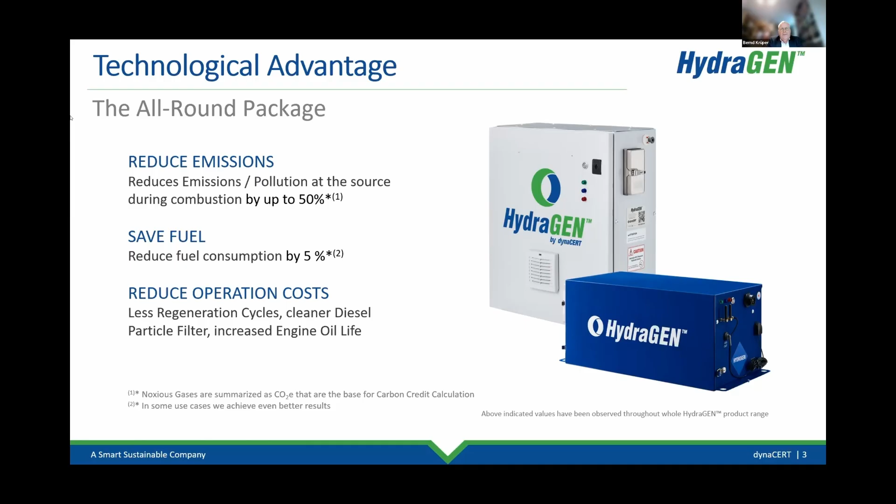That's the hardware. Besides the hardware, we also have software called Hydralytica. The hardware product itself is called Hydragen, corresponding to hydrogen, since hydrogen itself can't be protected. So our hardware is called Hydragen, and the software Hydralytica, relating to hydrogen and analytics.

With this is a telematics unit. We have our own ECU on our boxes. It's an autonomous system — we measure with the telematics the most important data like fuel consumption and emission reduction or pollution values. With Hydralytica, our own ECU and our own telematics, we can measure the fuel saving compared to using our box versus not using it.

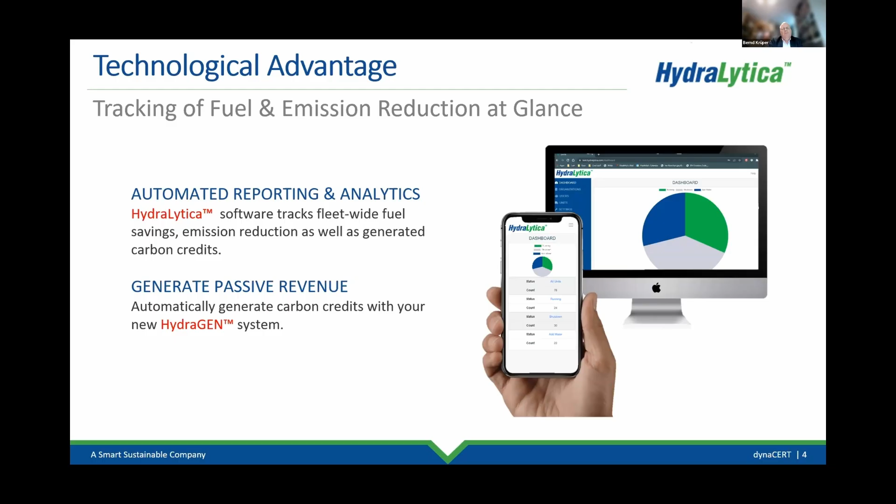Secondly, this is an important base for carbon credit generation, as we will generate so-called premium carbon credits. Premium means it's data-driven — not generic, but really based on the individual box and the individual fuel saving. Therefore, these will be premium carbon credits.

Having said that, coming back to the combustion solutions or the impact on combustion — as said, it's mainly a retrofitting solution. The box is filled, for example in a Class 8 truck, for roughly 80 hours of operation, meaning more or less a week, or 5 days of trucking, depending on working hours.

The driver fills in 2 liters of distilled water, which isn't too much. With this small amount of water, you can run the electrolyzing unit, creating hydrogen and oxygen for 80 hours.

This gas is sucked in — not injected — under pressure into the area in front of the turbocharger. In the turbocharger, it gets condensed, then brought into the combustion chamber, and with a hotter, earlier stroke and hotter combustion, you significantly reduce emissions and fuel consumption.

With less particulate matter and less pollution, you have a better situation in the combustion chamber as well as in the after-treatment. That means less regeneration of the DPF, the diesel particle filter. It's better for the catalyst, and a cleaner burn means a cleaner situation in the combustion room and after-treatment, which is commercially very valuable besides the fuel savings and emission reduction.

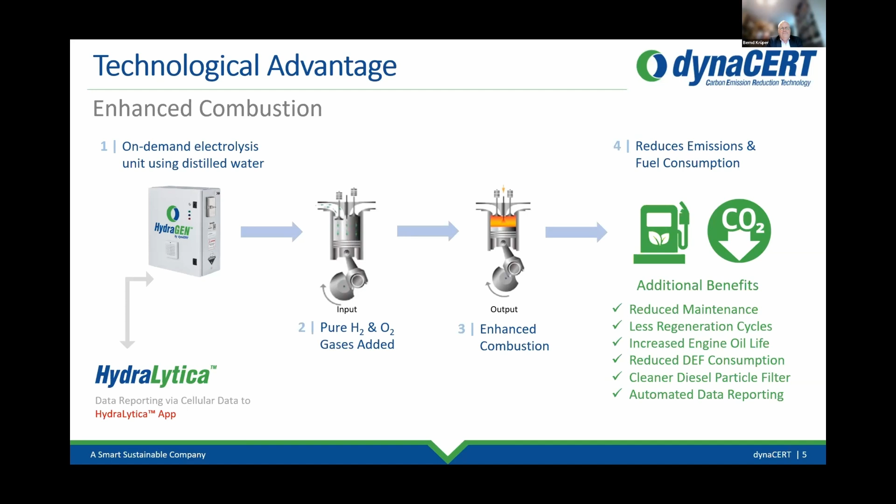Coming back to the box, what's the IP? The IP is, of course, on the electrolyzing. There are various patents, 18 in total, with more to come on the electrolyzing itself. Secondly, on the installation. Thirdly, on the ECU, where we have our own ECU asset, a completely autonomous system, independent from the vehicle, though of course connected to it.

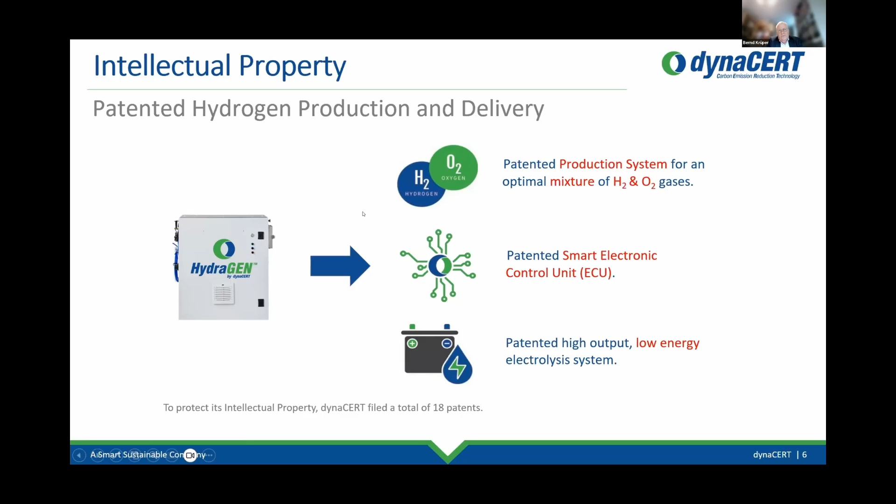We have a very low energy electrolyzing system. We need an impulse from the battery to start the on-demand production of hydrogen and oxygen, but it's not powering the equipment itself. It's a set with some chemicals, kind of a perpetual mobile, therefore a very low energy system, different from some competing solutions. That's the IP side.

Here we have the results of a test done on truck applications. Some of you may know it from Europe and elsewhere, running with an MAN truck, in this case in Germany, in the Black Forest. There we have roughly 10% CO2 reduction, 55% particulate matter reduced, significant 57% hydrocarbon reduction, and roughly 8-9% reduction in fuel, which of course is also a huge impact—really significant reductions.

Besides the test runs we have, we also have real-life, real test results—this is one of the examples. We have various installations in the world, various testing, and you know how this works in the retrofitting industry as well as new equipment. We have test bed results, test runs with specific customers and specific applications, and with positive tests, you move into fleets and bigger serious volumes, which we already have the first ones being executed.

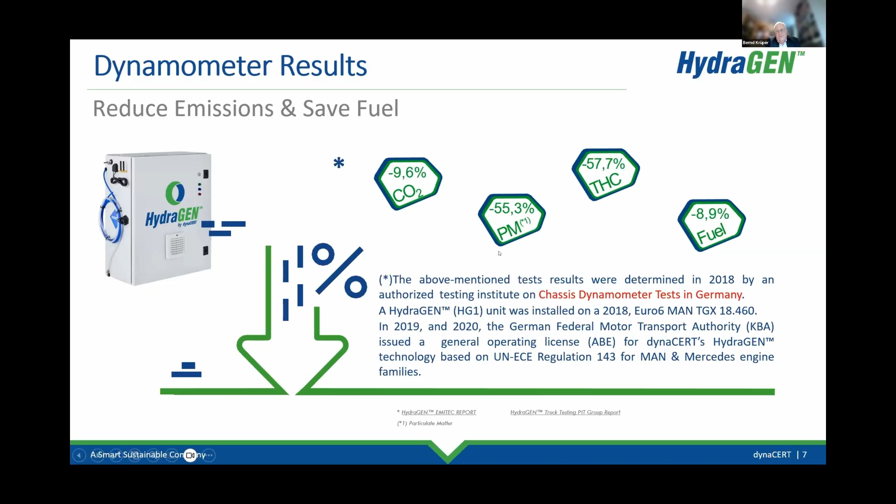Very interesting—a lot of examples, field tests, test installations, and pilot installations. The tests are done, and therefore more and more pilots are in the market, and also first series orders received.

Having said that, a few pictures on the product and applications. This is the so-called HG1 series. It's mainly for 10 to 15 liter, class 8 trucks, but as you can see with the pictograms, also for some construction equipment, agricultural equipment, and generators—more sizes to come, same alkaline electrolyzing.

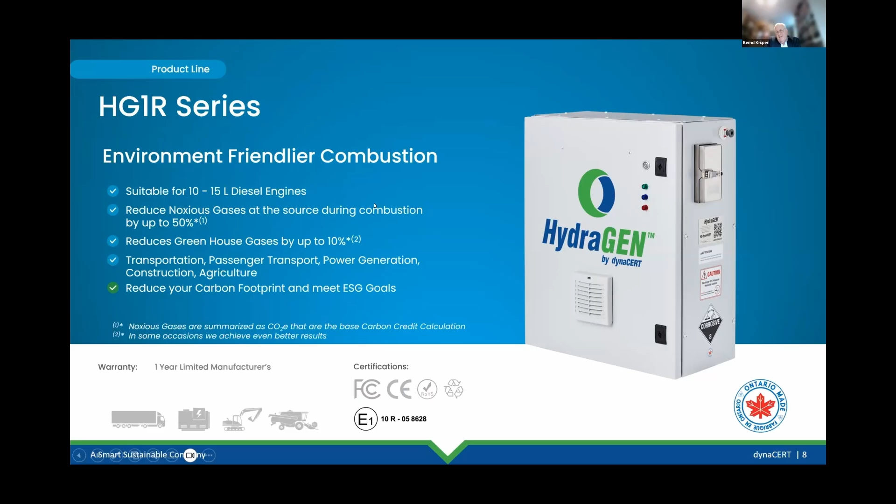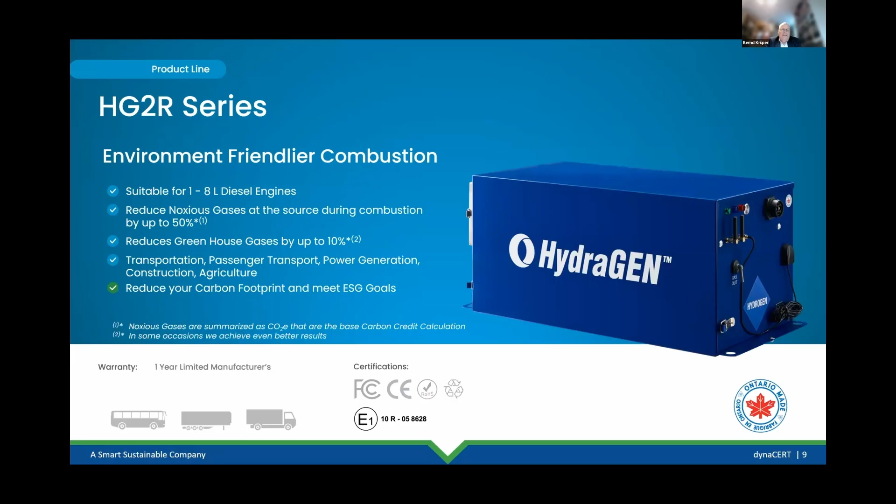And by that, reactor technology. We have a smaller one, principally for smaller engines, 1 to 8 liters, which would be the size of buses, cooling refrigeration trailers, or vans. And in the other dimension, for bigger units, we have the so-called HG 4C and 6C. 4 and 6C means the number of scaled-up membranes within the electrolyzing unit—same technology, but different scaling, different numbers of reactors for bigger mining truck engines, shovels, and bigger gensets, where we're already combined with the first MTUs, Caterpillars, and other well-known, well-reputed bigger diesel engines.

But as said, it's an autonomous system. Customers are usually not the engine manufacturers, but the operators, where we offer this as a retrofit solution, reducing fuel and emissions—this is the product. Principally four major product groups, reducing complexity, same technology, different scaling, different power ranges of engines. It's a Toronto company, assembled and manufactured in Toronto, but depending on the business and where most of it will be in the future, it can easily be localized in the various geographies where we're working, depending on how many units we need.

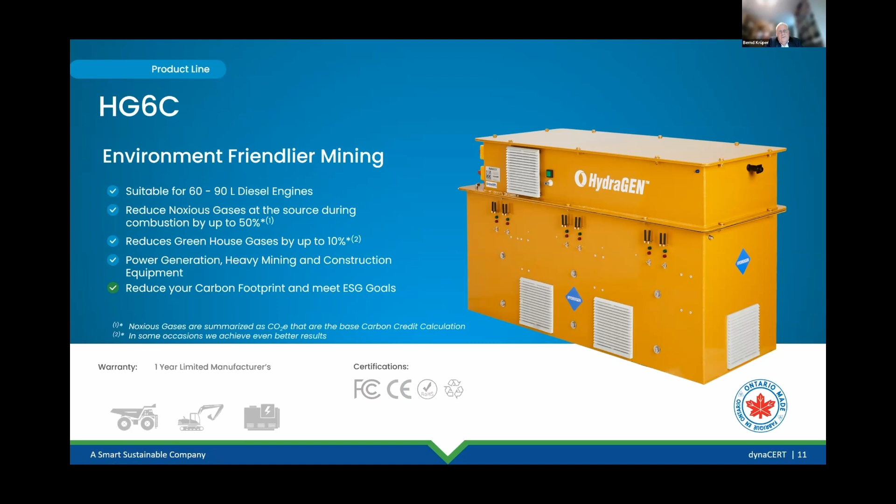Coming back to the applications, there you see a broad number of applications and products. It means principally our device would work with every combustion engine. Up to now, we are majorly in diesel. Why majorly in diesel? It's the biggest population, as you know, of diesel engines worldwide.

Secondly, majorly in the North American markets - we are a Canadian-based company, also having business in Europe and the Middle East and globally, but coming from North America, where the natural gas price is cheaper. Therefore, we also have positive results with gas engines. But as gas is relatively cheaper than diesel in that geography, we are majorly on diesel trucks.

More are also to come, getting into first pilot installations on HVO, hydrotreated vegetable oil, which in the Class 8 truck, majorly here in Europe, is getting more and more important. We'll soon have tests in the first pilot installations.

But coming back to where do we play majorly up to now? Majorly it's mining and oil and gas - on drills, gas compression, well servicing, on the generator side in oil and gas and mining, and of course in general power generation, as well as in Class 8 trucks. Besides that, you see various other applications.

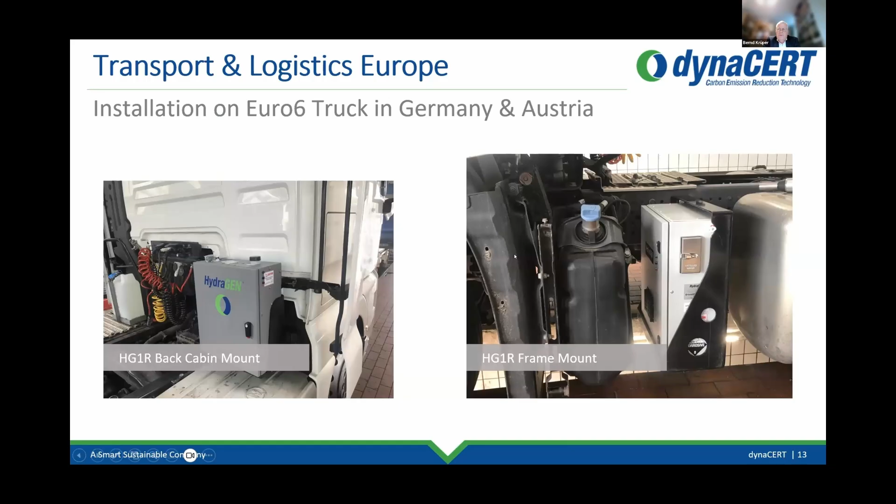It's not necessary to have it directly in the engine room, but of course there needs to be a connection to the turbocharger for sucking in the hydrogen and the oxygen, and some connection to the battery, which is roughly a 2 hour installation. It's not huge work to bring it to the truck, which makes it easy for the fleets and their workshops to install it on the vehicle.

We are supplying to some trucks of the Paris-Dakar racing, and you can imagine that this installation in the desert, in the dirt, in the heat, under toughest conditions, needs to be a very serious and proper installation. There, the product needs to be reliable. You don't want the vehicle to be out of order. Therefore, we now have the second year, and very good results are being achieved. And of course, good advertising, but also a good challenge for the equipment to show our reliability and the reasonable support to the vehicle and to the powertrain by our equipment.

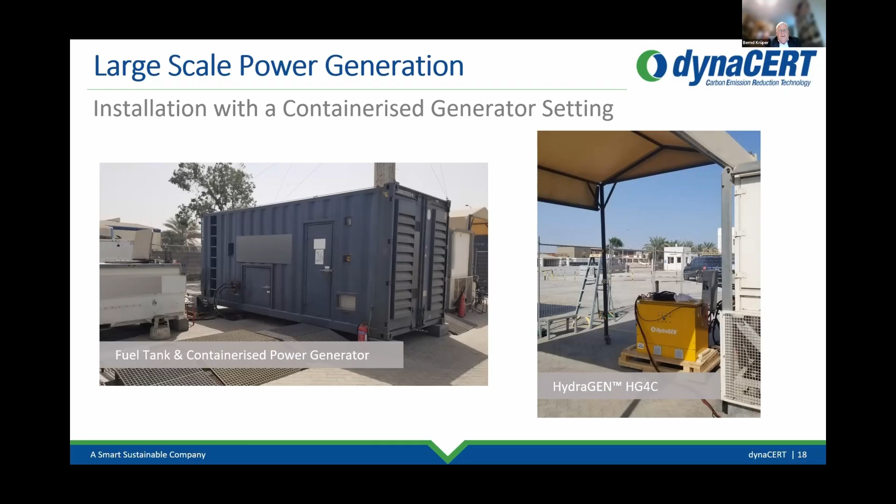Okay, good. Having said that, coming a little bit from the product and the installations to what did happen in the company. Those who followed our presentation or already met us know that we added various competences to the already capable team, such as the company around Jim Payne, the CEO and chairman, already for years capable and positively developing the electrolyzing and exploring first markets.

As we said, we have hardware, software, and carbon credits, therefore a lot to do with emissions. We are happy to have convinced James Tansey, one of the real emission and carbon credit experts, I may say, an Oxford teacher among other things, to join our board of directors.

This guy has a history with MTU, big diesel and gas engines, heading their sales and service with Rolls-Royce and with Daimler. He headed the German diesel engine manufacturer Hatz, therefore knowing quite well what off-highway applications are about besides on-highway, and also knowing the powertrain and the impact of hydrogen in combustion chambers and the complete powertrain.

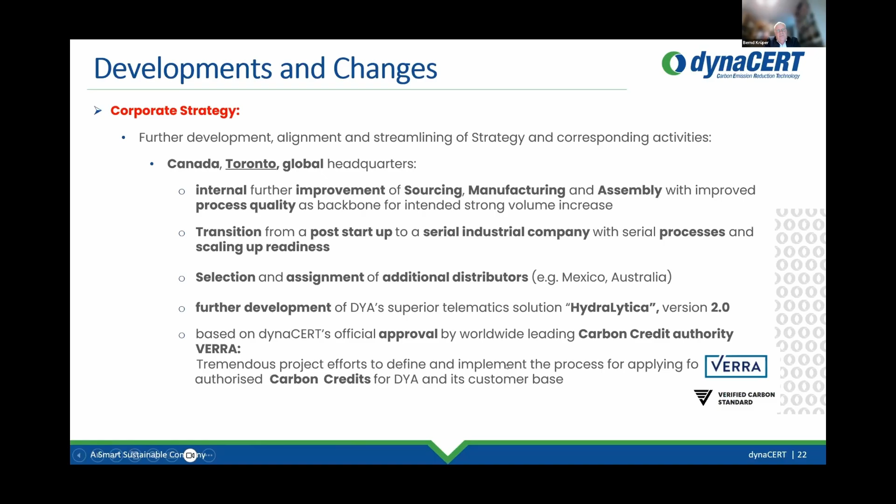We added some salespeople, changed some guys, and brought in more and more technical, installation, and hydrogen experts. As you know, it helps to have very close interaction and understanding between hydrogen creation, oxygen creation, the powertrain, and the different combustion processes, which we have more and more now.

Of course, we are also funded and publicly listed. We made recently the next round of fundraising. We want to, and have to, invest into growing our business, into preparation for bigger volumes. Our production capacity itself in Canada is quite reasonable, so from the assembly side we are principally fine.

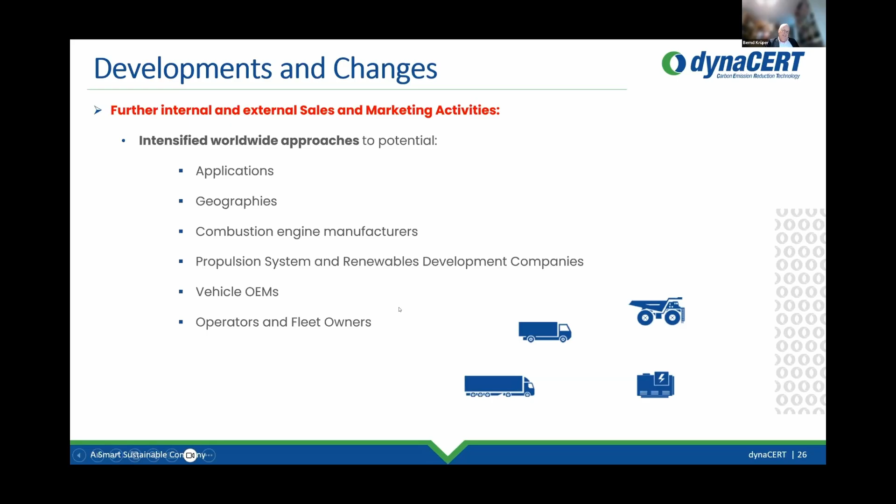As said, we are majorly a retrofit solution. That means our major target group is the operators and fleet owners, to help them reduce fuel and emissions. But of course, the engine manufacturers and vehicle manufacturers see more and more that we are on their vehicles, and therefore we are having reasonable discussions and first topics with them.

We go into more and more geographies, as said: Australia, Middle East, Mexico. We won new dealers and distributors in South America, Chile, Peru, etc. Argentina, we are quite active. Mexico too.

What do we want to do? We want to grow the volume and the turnover, which is our task and job, winning new leads. By that, we will also create subscription earnings out of our carbon credits and out of HydraLytica. With that, we want to grow the cash in, the value of the company, and hopefully, and very likely, the share price.